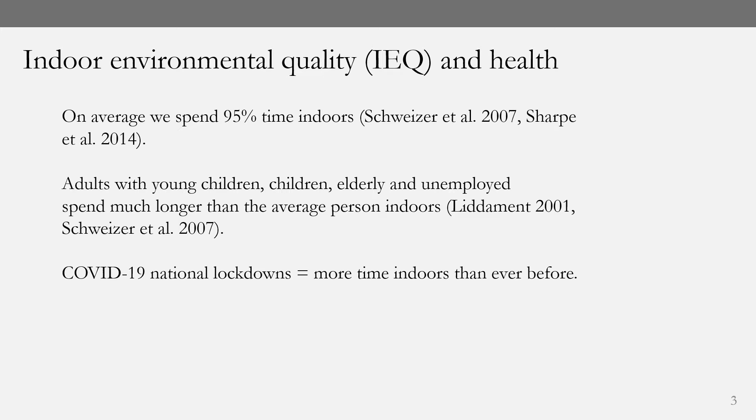The indoor environment is comprised of 4 component parts: thermal environment, acoustic environment, visual environment, and air quality. Whilst we spend time indoors, we're exposed to these components, and these components have the potential to affect our health and well-being. First, I'll discuss the thermal environment, where exposure to high and low temperatures can affect our health.

Low temperatures affect the human body's cardiovascular and respiratory systems and can lead to death in humans. There were an estimated 41,000 excess winter deaths in the UK during 2014. And these excess winter deaths are expected to reduce by 2% by 2050 due to the effects of climate change.

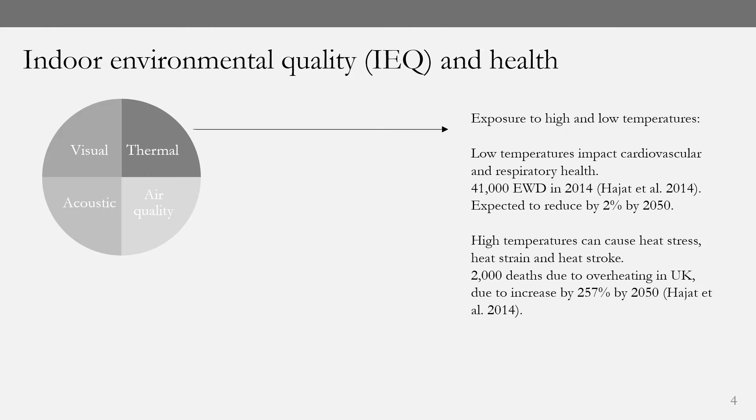Exposure to high temperatures can cause heat stress, heat strain and heat stroke. There were an estimated 2,000 deaths due to exposure to high temperatures in the UK during 2014, and these are estimated to rise by 257% by 2050, again due to the effects of climate change.

Indoor air quality is a broad term and encompasses chemical and particulate pollutants that are present in the indoor air. Exposure to air pollutants can result in a wide range of health and well-being issues in humans, but the main health issues are to the cardiovascular and respiratory systems. Some components of indoor air quality can also have an indirect impact on our health. For example, humidity can affect mold growth, and mold can impact the human respiratory system.

There are an estimated 3.8 million deaths every year around the world due to indoor air pollutants, 99,000 of which are in Europe. Exposure to particulate matter is the leading risk factor for burden of disease in Europe.

Exposure to noise can affect health and well-being in many different and complex ways. Annoyance and sleep disturbance have the strongest evidence for effects of noise on health, where this can result in fatigue, reduced performance, cardiovascular illness, and mental health issues. Noise is the second leading risk factor for burden of disease in Europe after particulate matter.

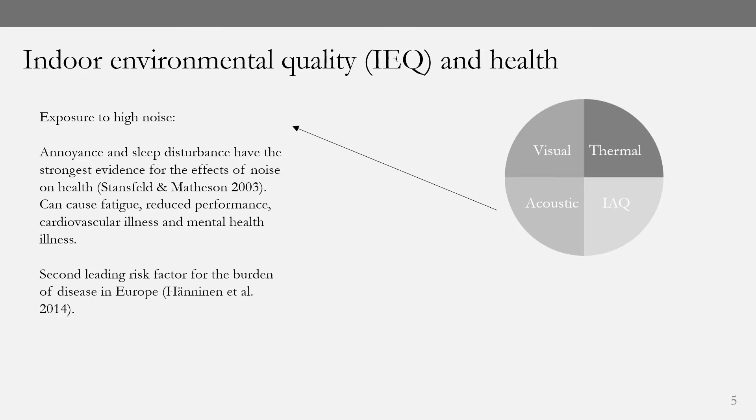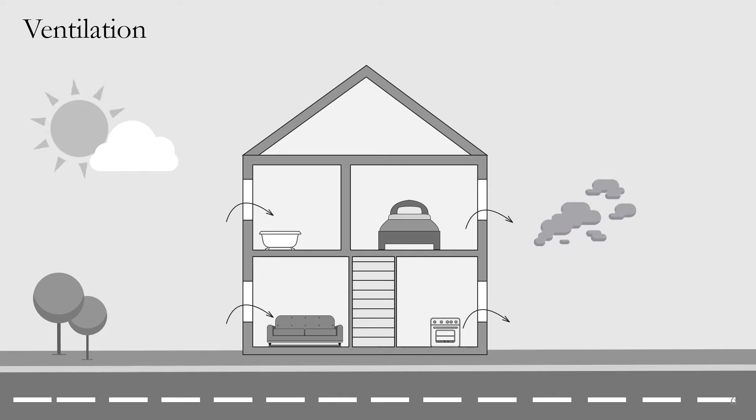Ventilation can be defined as the removal of stale, polluted or warm air from inside and replacing this with fresh, unpolluted or cooler air from outside. In the UK and Europe, natural ventilation is the dominant form of ventilation, comprising of trickle vents, extract fans in the bathrooms and kitchens, and by opening windows.

Trickle vents provide whole dwelling background ventilation, which is a constant low rate ventilation for managing indoor air quality. We have intermittent extract fans in our bathrooms and kitchens, which control odour and moisture generation from cooking and bathing. And we have purge ventilation by opening our windows to control air quality during occasional activities such as painting, decorating, or the accidental release of smoke or water.

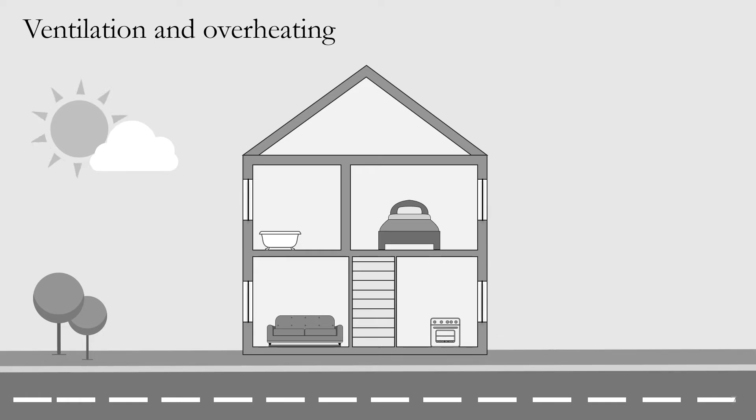There's general agreement between the theory, modelling studies, and the limited empirical research considering the relationship between ventilation and overheating. These studies generally show that when the outdoor air temperature is lower than the indoor temperature, high air exchange rates will reduce the indoor temperature and reduce the risk of overheating. Not all empirical research has found this relationship, as it is often difficult to disentangle the cause and effect of overheating.

Modelling by Taylor et al. illustrated the interdependent relationship between overheating, indoor air quality, outdoor air quality, and ventilation, where ventilation was shown to reduce overheating and indoor concentrations of pollutants from indoor sources, but increase the indoor concentration of pollutants from outdoor sources. This is important as it highlights that occupants that choose to open their windows in an effort to reduce overheating might inadvertently increase the concentration of pollutants from outdoor sources.

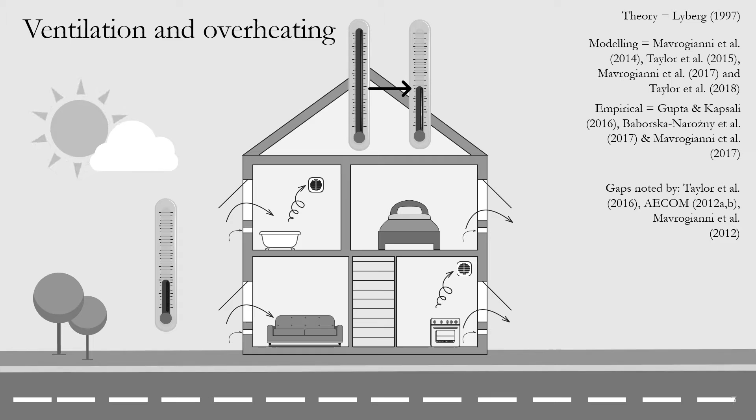There is limited empirical research considering overheating in the UK and a lack of research considering the relationship between occupant behaviour and building overheating. The current empirical research lacks measurements of air exchange rates, has small sample sizes, and lacks measurements of other aspects of the indoor environment. Furthermore, typically overheating is considered in isolation from all of the other aspects of the indoor environment.

The literature describes that when there is an air exchange set up between indoors and outdoors, for example when opening windows or operating ventilation systems, indoor concentrations of pollutants from indoor sources such as carbon dioxide and volatile organic compounds will be reduced by dilution or removal. However, indoor concentrations of outdoor pollutants such as particulate matter and nitrogen dioxide will increase.

Conversely, occupants might not want to open their windows due to noise, air pollution, security, or for many other reasons. In this case, low air exchange rates will result in higher concentrations of pollutants from indoor sources and lower concentrations of pollutants from outdoor sources. Closing the windows can also cause overheating, as previously discussed.

The relationship between ventilation and pollutants from different sources was demonstrated through modelling of particulate matter by Taylor et al. and empirical monitoring of nitrogen dioxide by Dimitropoulos et al. Both found higher indoor concentrations of pollutants from outdoor sources in dwellings with higher air exchange rates when compared with dwellings with lower air exchange rates. Dwellings with lower air exchange rates had higher concentrations of pollutants from indoor sources.

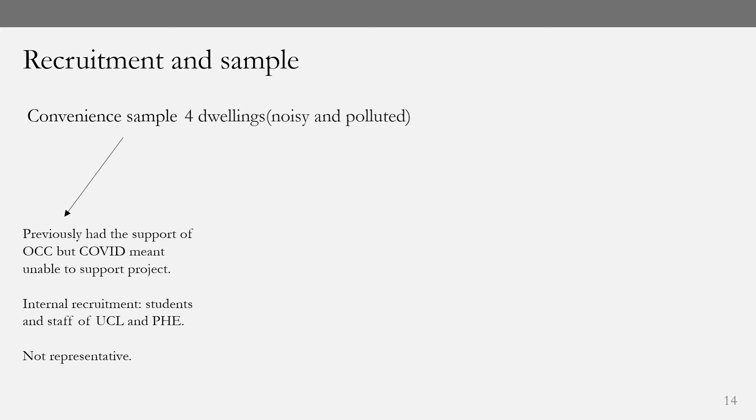I carried out a multi-criterion decision analysis for all respondents, which allowed me to shortlist and select 4 participants. The MCDA was based on the suitability for the monitoring campaign and other features such as noise and outdoor air quality. Some of the sample are students and some are public health professionals, so there might be some expert knowledge of ventilation, the indoor environment, and how this impacts health.

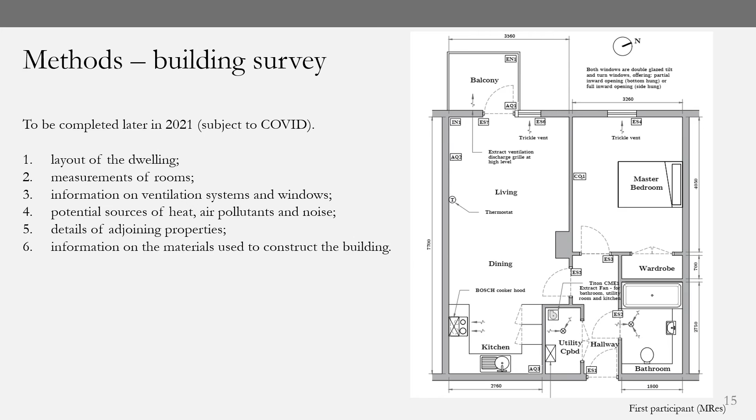I'm using a range of specialist equipment for collecting data on indoor environmental quality. I'm measuring temperature, humidity, carbon monoxide, carbon dioxide, nitrogen dioxide, PM1, PM2.5, PM10, total volatile organic compounds, and noise inside and outside of all dwellings. I'm also measuring when any window or door is open or closed.

The noise equipment that we're using was developed by Ben Fenech and myself, which is based on a Raspberry Pi small computer with 2 microphones. This equipment was used in developing a novel method for inferring window positions, which I'll discuss later in this presentation. These devices deconstruct the indoor and outdoor sound signals in real time into the spectral components. So it doesn't store audio files, only 5-minute average third octave frequency data in numerical form.

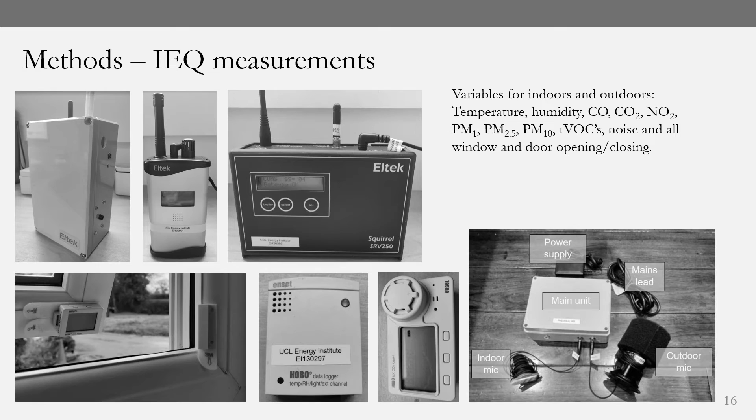Ethical considerations were key in developing this equipment and indeed featured heavily in the ethics application for this project. The variables I'm measuring are the aspects that are known to impact health, and I'm measuring the most important indoor environment variables for health. There are of course others.

COVID presented unique challenges to the monitoring campaign. Normally I'd install the equipment myself, but this was not possible due to COVID. During November and December of last year, I modified all of the equipment and tested it so that it could be pre-configured, disinfected, packaged and couriered to all participants for them to install themselves.

The equipment was sent to participants in January. They quarantined the equipment before installing it using detailed installation instructions I produced and video calls and WhatsApp messages.

The literature review highlighted that occupant ventilation behaviour has the biggest impact on the indoor environment. It is therefore important to try and understand the reason for this ventilation behaviour if we were to understand the interaction between humans and the buildings as part of the complex socio-technical system described by Lowe et al.

The questionnaire was developed based on the factors identified in the literature review as important for ventilation and the indoor environment. Similar or the same questions were used from other research in this area to facilitate insights across this and the other research projects.

The questionnaire was trialled and refined based on feedback, and the final questionnaire was issued using an electronic platform to all participants in January 2021, which was just before the start of the main technical monitoring campaign.

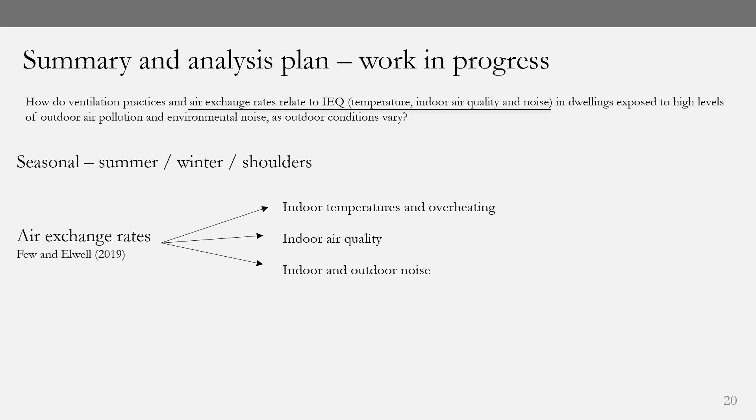I'm also considering different ways of evaluating indoor environmental quality, and one method I'm considering was developed by Larsen et al., which considers indoor environmental quality as both components and also as a composite.

Other analysis of the technical data will involve calculating pollutant exposures and correlating these exposures with air exchange rates, comparing air exchange rates and exposures with recognized thresholds, and I also plan to look at potential relationships and correlations between indoor environmental quality components.

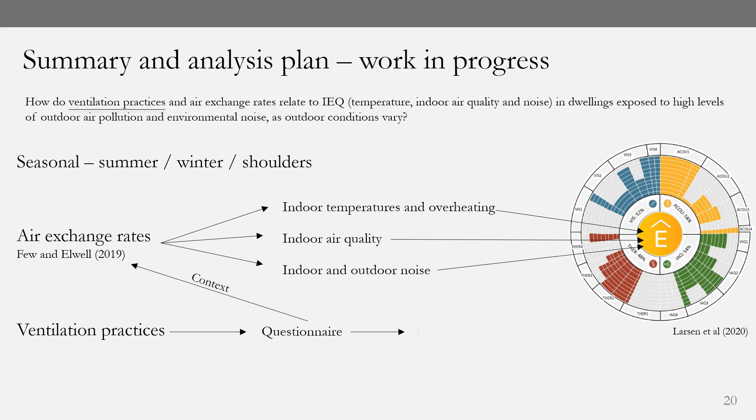Next, I'm interested in the social component of ventilation. I'll use my questionnaire for both contextual information and also to relate to ventilation behavior. I'll code my questionnaire and look for relationships and correspond the phenomena I see in both the qualitative and quantitative data.

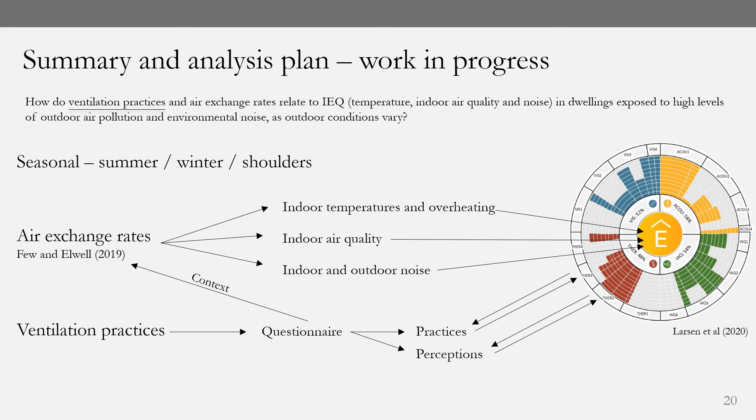For example, some of the questions I can consider between quantitative and qualitative data are: do people ventilate when they say they do? Or do occupant perceptions of the indoor environment align with the measurements of the indoor environment? This concludes the description of the methods and analysis I will use in my project.

In this next section of my seminar, I will describe a significant piece of work that I've carried out over the past year. This is a novel method of inferring window positions from sound data. I'm currently writing this up and hope to submit to a journal for publication in the coming month or two.

A bit of background. Researchers typically record window opening and closing by using occupant diaries, observation by researchers, or more recently by using electronic reed switch loggers. Diaries and observations are labour intensive and can suffer from low temporal resolution and inaccuracies. However, electronic reed switches can also be intrusive and not always found to be acceptable to occupants. They are expensive, can be unreliable, and importantly, they're not able to differentiate between different window positions. They only really measure closed and open window positions.

For these reasons, I developed a method to predict if a window is open, ajar, or closed by using a statistical model which has been trained using the differences in third octave frequency sound data collected inside and outside of a window.

An overview of the method is shown below. Step 1, calibrate and install the equipment and survey the installation setting. Step 2, with the equipment logging, we change the window position and record the times and window positions over a set training period. The noise data and the window position form the training data.

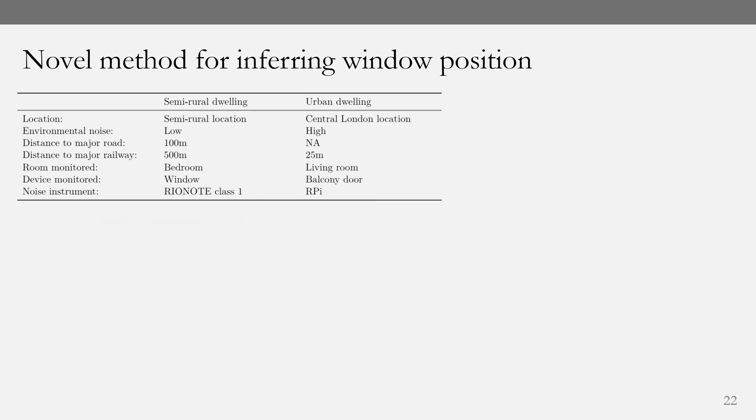This method was applied to 2 case study dwellings, one a semi-rural setting and another in central London. In both case studies, noise was measured inside and outside of a window using a number of different metrics. In the semi-rural case study, a specialist class 1 instrument was used to measure the noise inside and outside of the window simultaneously. But in the London dwelling, Ben Fenech of Public Health England and I developed a novel noise measurement platform based on the Raspberry Pi small computer.

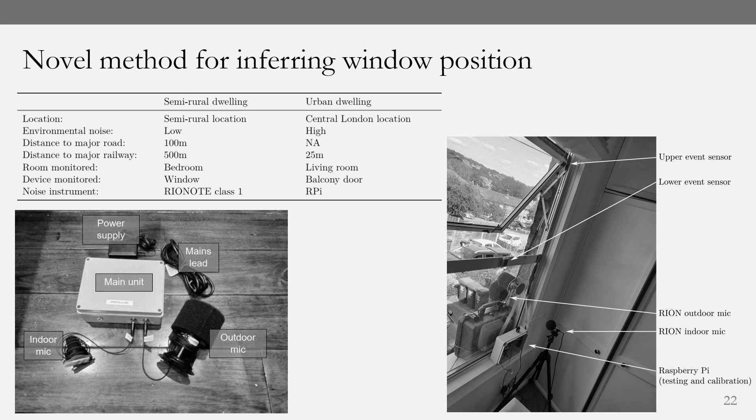This device measures sound inside and outside of a window simultaneously and processes the sound into its spectral components and stores this data, which we retrieve by GPRS. The campaign was run for 9 days in the semi-rural dwelling and 3 months in the urban dwelling.

I trained 6 models for each case study using linear and multinomial logistic regression. I used 3 sets of data for each model. The first one was using all of the third octave frequency data. The second set was using third octave frequencies below 1 kHz. And finally, using the top 10 frequencies identified by sequential forward feature selection.

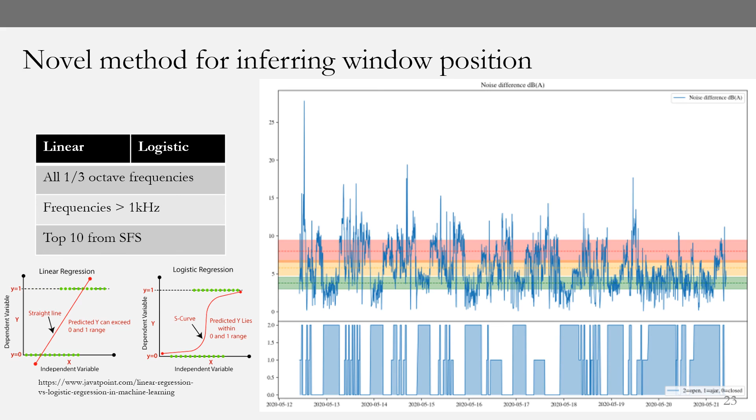Detailed analysis shows that the lower accuracies in the semi-rural dwelling were attributed to the fact that there were a large number of ajar positions recorded in this case study, and the models have the greatest difficulty in differentiating between the ajar and closed positions. In the urban dwelling, by comparison, there were not many ajar positions recorded, so the model was more accurate in differentiating between the open and closed positions.

To conclude, this method provides an accurate way to infer window positions from sound measurements taken inside and outside of a window or door. This allows intermediate or ajar window positions to be inferred where other methods are unable to do so. It also provides an effective alternative to electronic reed switch based sensors where sound is already being measured.

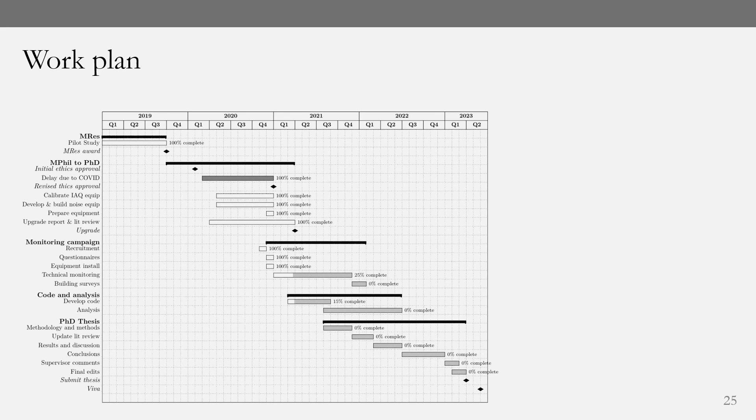Finally, I'll wrap up my presentation by summarising the work I've done to date and the work that remains to be done over the coming 2 years or so. I've successfully carried out a pilot study employing all of the equipment for the main monitoring campaign in a single case study flat during 2019. I'm currently co-authoring a paper on HVAC optimization which used the data I collected during this pilot study.

I've had my original and revised ethics applications approved. The revised applications included numerous COVID-19 specific measures. My risk assessment has been approved, again with a number of COVID-19 specific measures. The noise equipment was designed, developed, built and calibrated, along with the preparation and calibration of all the other technical equipment. I completed recruitment for dwellings,

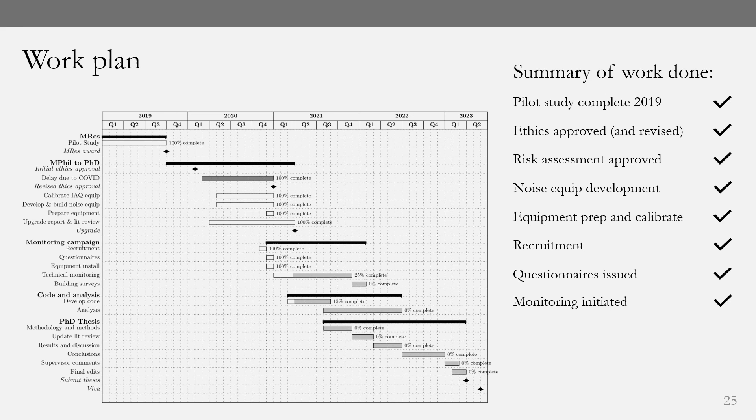issued the questionnaires, and despite the challenges around COVID-19, I was able to set up and initiate the technical monitoring campaign entirely remotely. This campaign will run for a total of 9 months, ending around September this year, after which I will uninstall the equipment and carry out post-monitoring cross-calibration for all the equipment. I hope to carry out the building surveys later this year, subject to the restrictions around COVID.

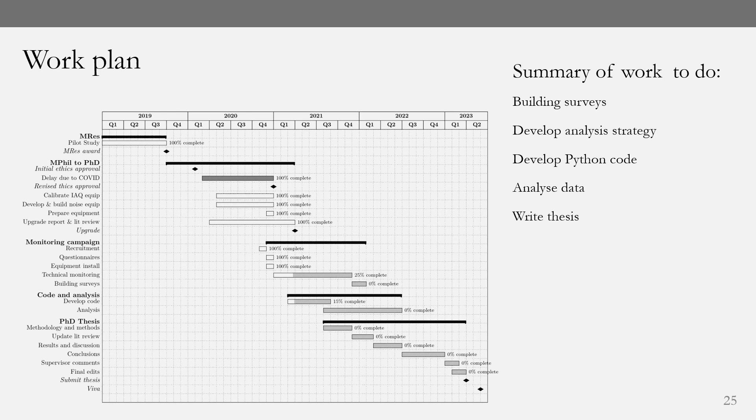I'm currently working on my data analysis plan and the Python code I'll use to analyze the data, which I'll probably be working on for around the next 4 or 5 months. I'll analyze parts of the data when I'm able to and refine the analysis accordingly. After the analysis, I have a planned period of 9 months to complete the write-up and submit my thesis.